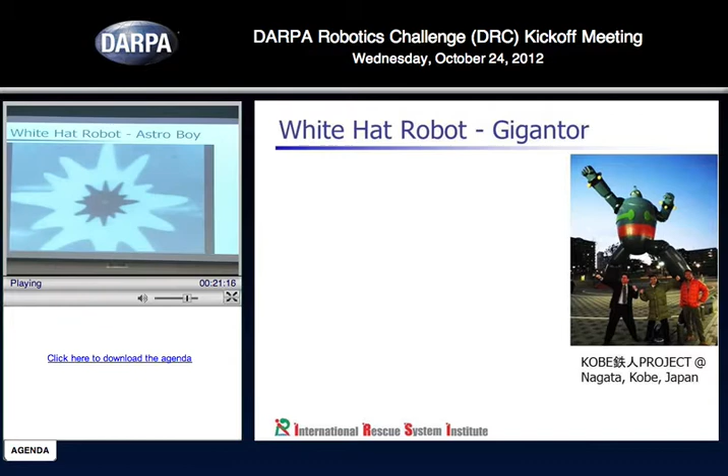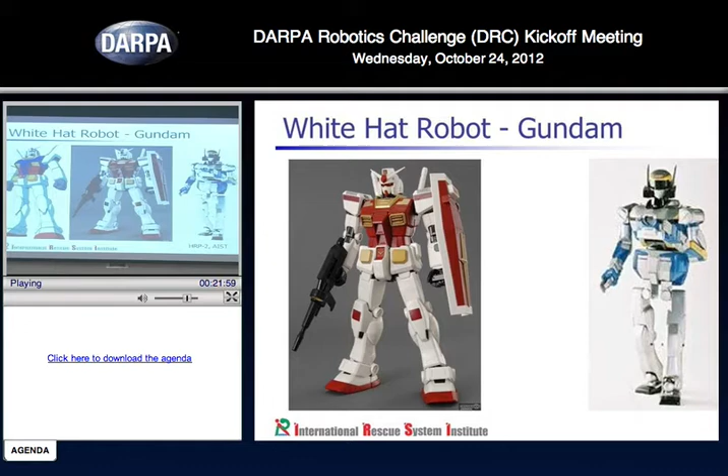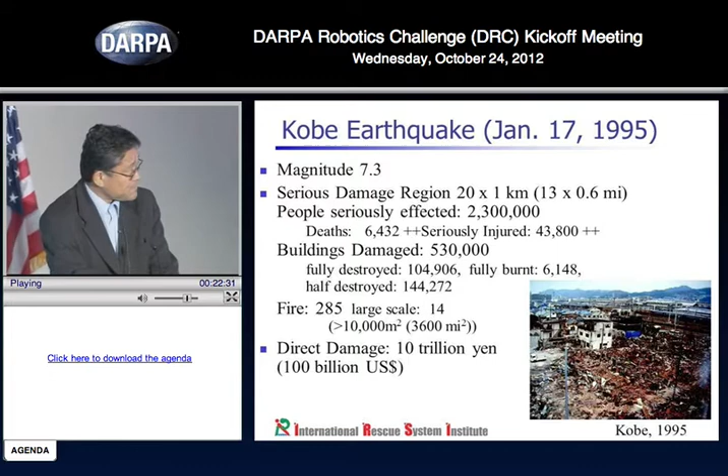At that time, I was really surprised to know more of this, and became completely involved in studying rescue robots. So we studied rescue robots from that time. This is one of the big projects of the Japan Ministry of Education, called the DDT project. I published a book from Springer, so if you're interested, please buy the book.

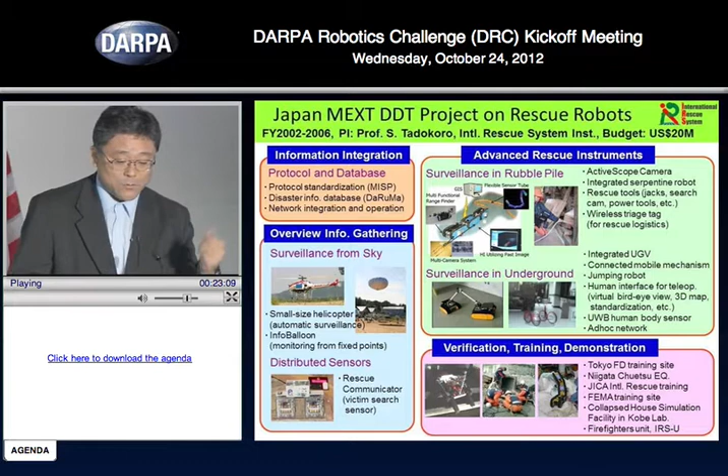This is a post, and yes, we did several things, for example a helicopter or some balloons to gather information or distribute sensors, a snake-type robot for surveillance in rubble piles, or UGVs, and some database for gathering information and so on. This is one of the outcomes of this project. The left-hand side is a normal video scope, but it stops here. However, our active scope camera can penetrate deep into rubble piles, so it is a very nice property in rubble piles and also in pipe inspection.

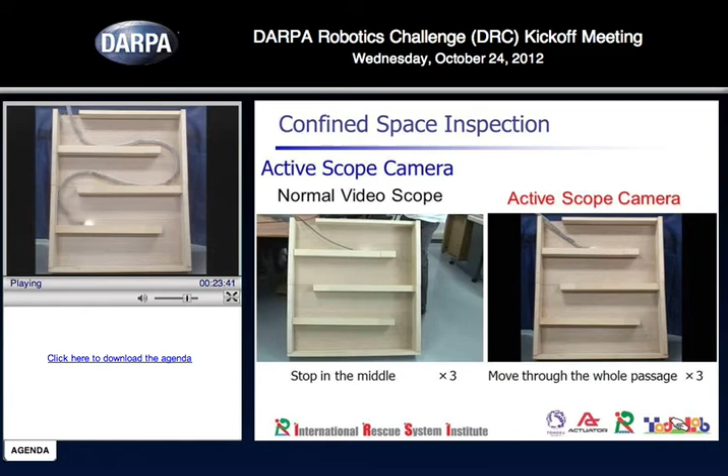It was applied to this construction accident which happened in 2007 in Jacksonville. For the forensic investigation, it was used, and it could gather evidence and information 7 meters deep in narrow spaces, particularly the shape and direction of cracks and cross-section of flakes and so on. So it helped that forensic investigation very much.

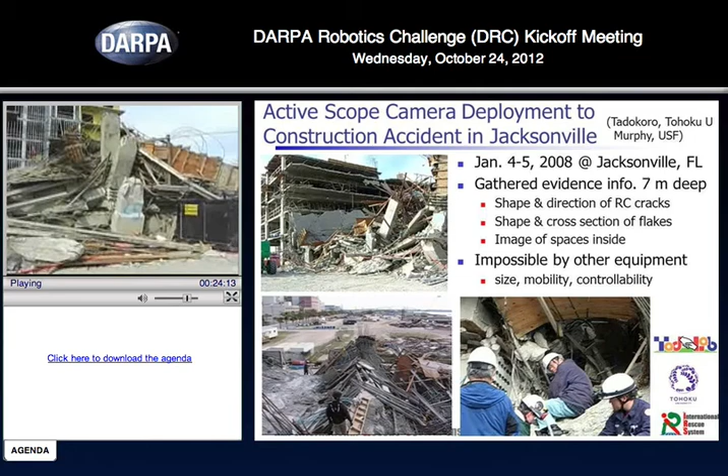And this is another case of a real accident. This is the Cologne historic archive collapse, and the active scope camera was deployed there, but actually it was not used there.

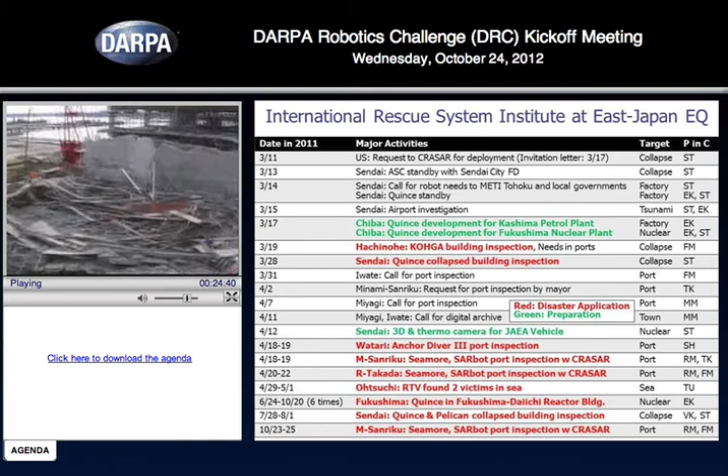So this is the list of the response by the International Rescue System Institute, which I established in 2002. We did several things after March 11th. The main things are: one is building inspections by UGVs, port inspection and victim search by ROVs, and the third is the Fukushima Daiichi reactor accident response.

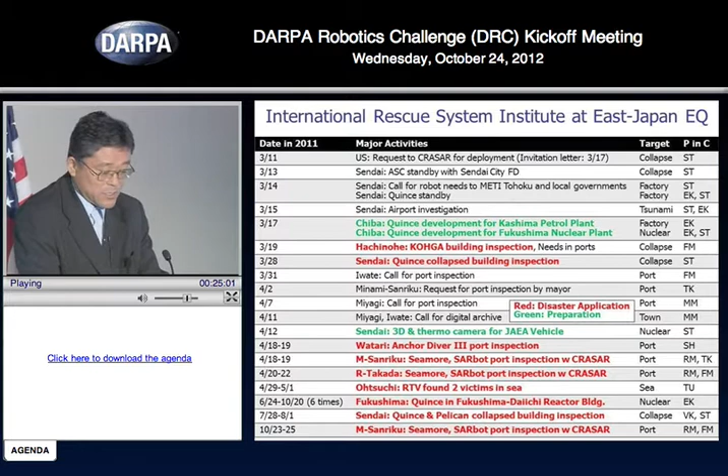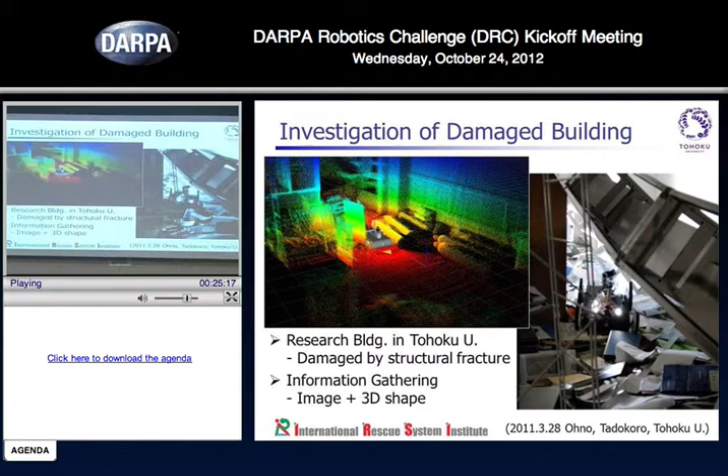This is an example of the investigation of damaged buildings. This is a research building in Tohoku University, and we made surveillance in the buildings two weeks after the earthquake, in collaborative work with Professor Vijay Kumar of University of Pennsylvania.

Maybe he is here. I told him in the morning.

It was really nice collaborative work because this is Quince, our robot, and this is Pelican, made by Professor Vijay Kumar. Vijay's robot could enter this narrow space autonomously, but Quince could not because it is too big. However, the Pelican can fly only 10 minutes. So the collaboration between UAVs and UGVs is really convincing, a promising way for surveillance of whole buildings.

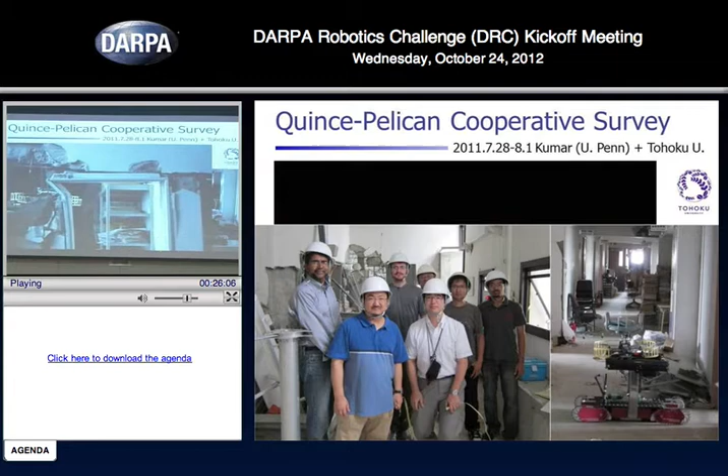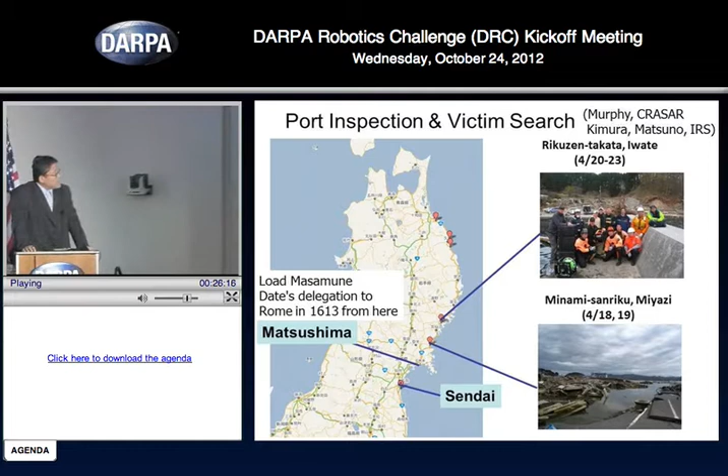This is another one, the port inspection and victim search, done by Professor Robin Murphy, Professor Fumitoshi Matsuno from Kyoto University.

The actual number was 30 microsievert per hour, and human workers could work there, but we could never live there. In these situations, our robots should work - that is the real application of the robotic system.

What are the needs of robots in Fukushima Daiichi? One mission is stabilization of the system, for example cooling and confinement of radiation, and decommissioning to extract the nuclear fuel is also a mission.

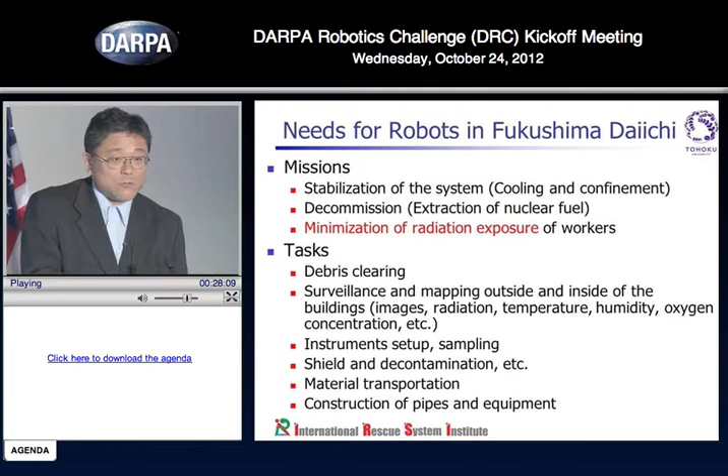Robotic systems are needed because minimization of radiation exposure is very important. There are several tasks: debris clearing, surveillance and mapping, instrument setup, sampling, shielding and decontamination, material transportation, construction of pipes and equipment, and so on. So many problems - we should create robotic technology for this purpose.

I really thank the iRobot company who donated 2 PackBots and 2 Warriors to TEPCO, Tokyo Electric Power Company. PackBot contributed significantly to the shutdown of this accident because it entered the nuclear building first. If we didn't have PackBot, we couldn't know the situation inside, and this operation could have been delayed significantly.

However, there was a problem. TEPCO people tested PackBot in Unit 5, and they found PackBot cannot go up to the second floor because of a lack of mobility.

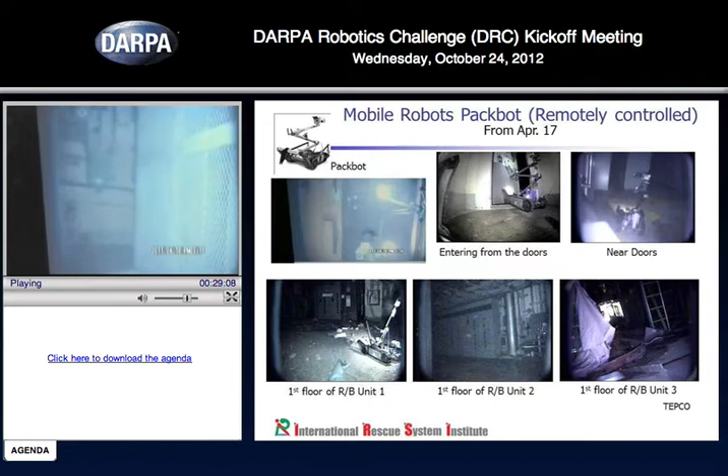Therefore, that was the reason our research robot, Quince, was used. This is a comparison between Quince, PackBot, and other robots. Quince is a research robot, so it has no established reliability, however it has excellent mobility, as I'll explain later.

PackBot is significantly used in Afghanistan and so on, with more than 4,000 units in use, so it is very reliable. But unfortunately it could not go up to the second floor.

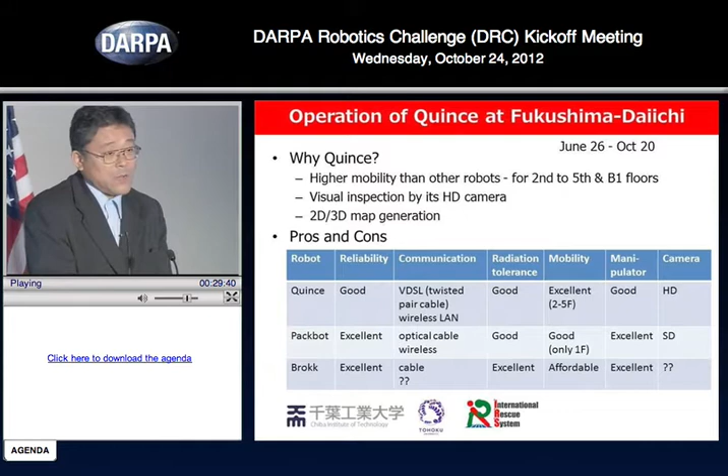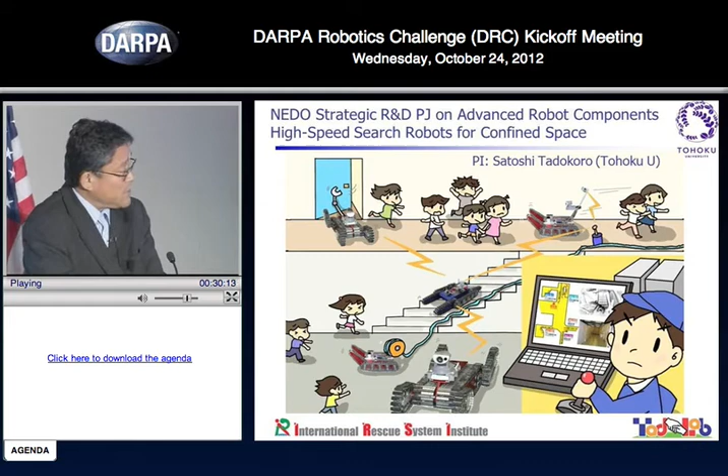However, in a disaster situation, mobility is insufficient and sensing capability is insufficient. Wireless is sometimes very unstable, and the human interface is not sufficient. So we wanted to solve those problems.

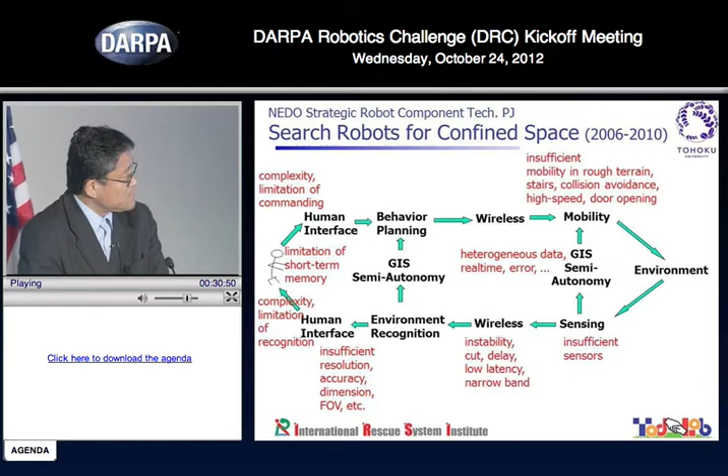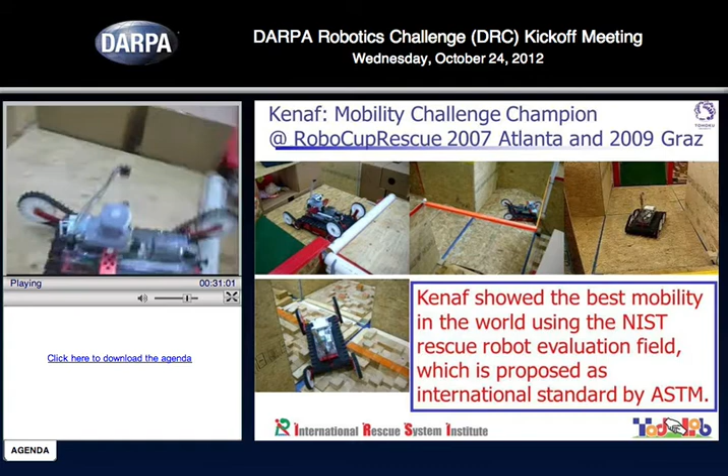We produced Quince and Kenaf as a previous version of Quince, and we tested Kenaf and Quince extensively in the RoboCup Rescue competitions.

In RoboCup Rescue, NIST designed the test method and the competition arena, applying the test method to these competitions. Kenaf achieved good mobility because of this test method.

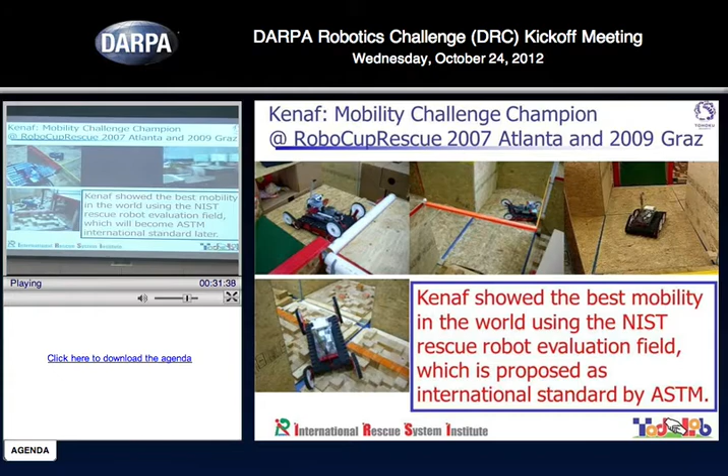So we really thank the NIST people, especially Dr. Adam Jacoff over there. Okay, this is another experiment.

This is E-Defense, the world's largest shaking stage, and we used this opportunity of collapse of a 3-story real building. We tested our robots with the Kobe Fire Department for entry into collapsed houses, mobility on collapsed roofs, mobility on beams of roofs, and so on. This type of real experiment helped us make Quince and Kenaf perform better.

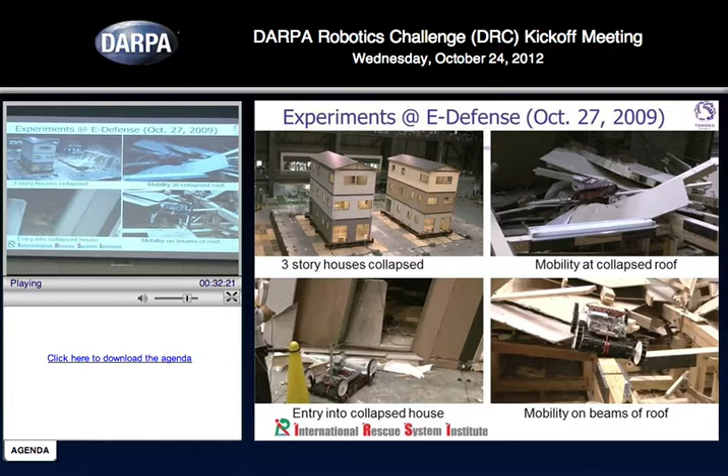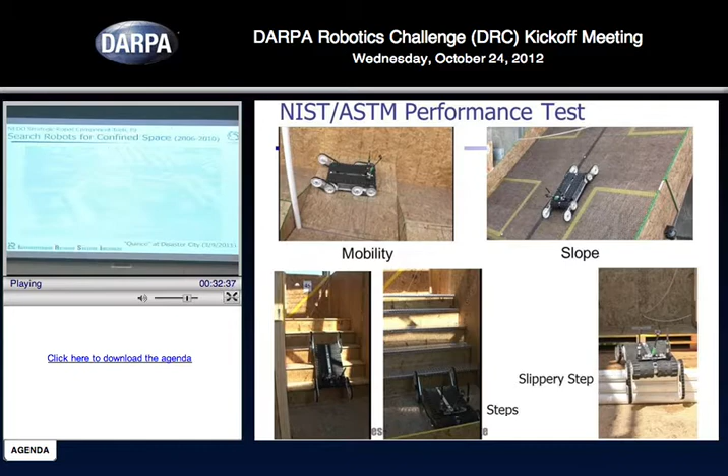And this was the test of Quince at the disaster city in Texas. And it was actually 2 days before the 3.11 earthquake.

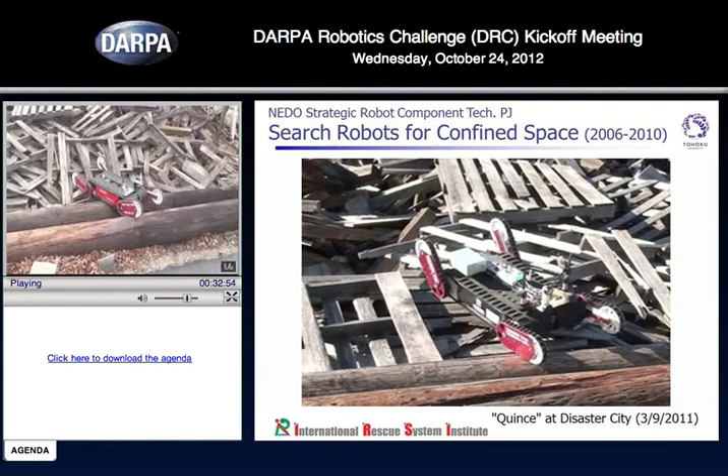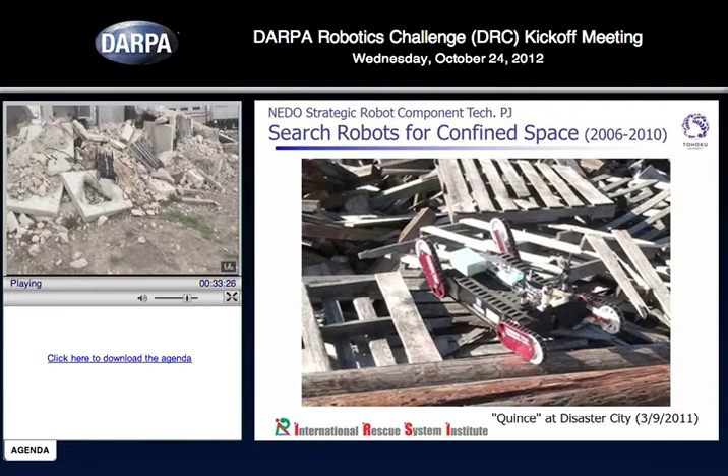I was really happy at that time, but after that, some very bad news from Japan arrived.

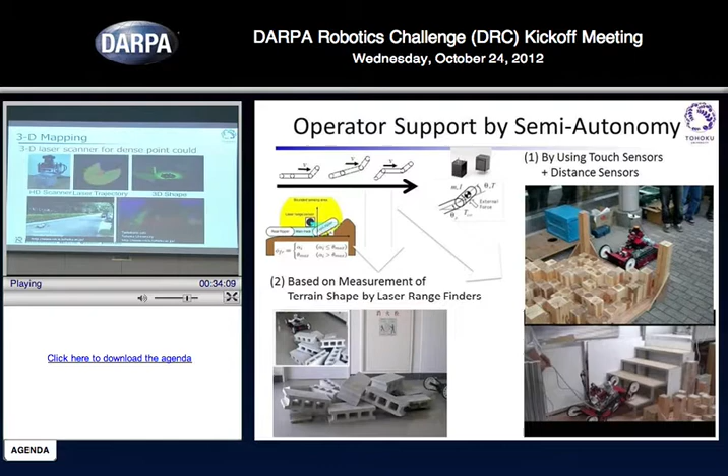And this is 3D mapping, using this HD scanner with a laser finder, we could make this kind of map very easily.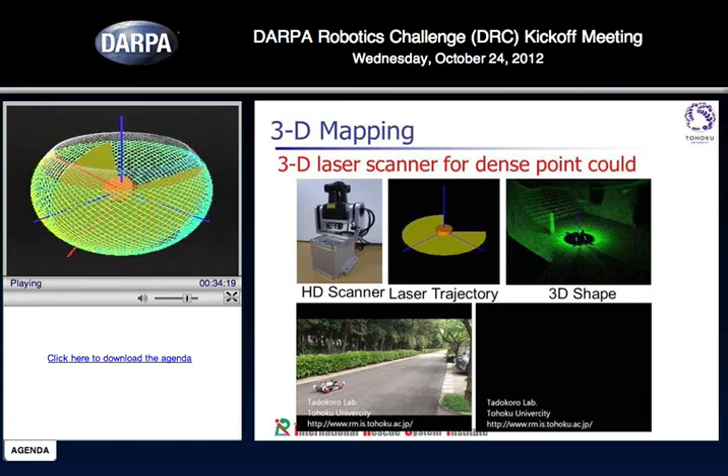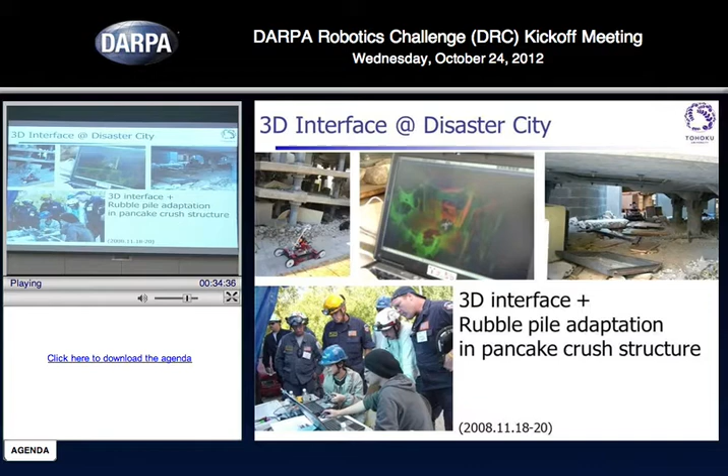This is an application to teleoperation at a disaster city. There are 3D obstacles, so we needed this type of human interface to teleoperate this creature in this pancake crush simulated facility.

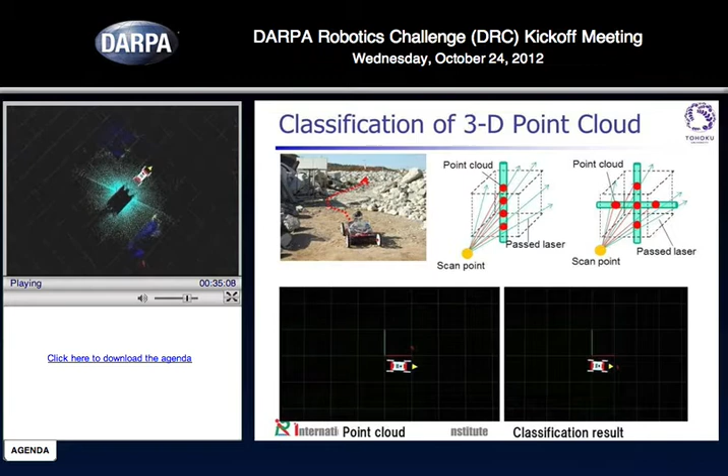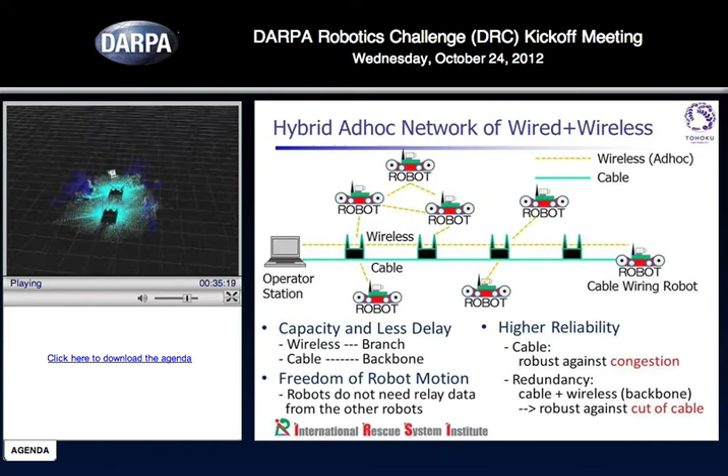We also developed a hybrid ad hoc network, which uses wired and wireless network. Using the cable, it is very broadband, and near the access point robots are teleoperated via direct connection by wires. But at a distance, it becomes an ad hoc network, controlled via the robot.

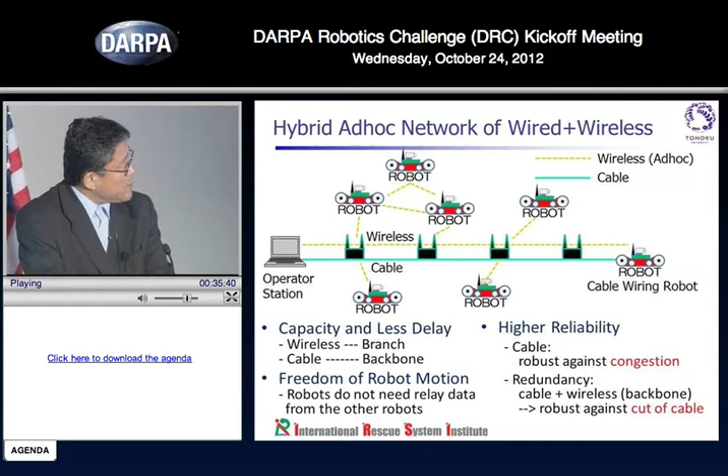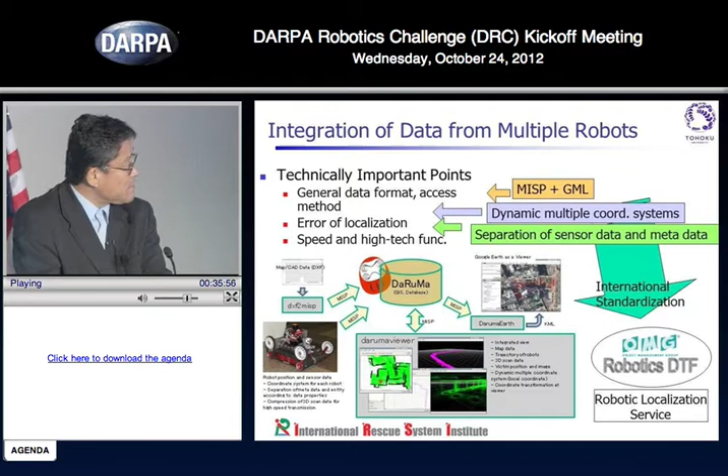However, this Quince was not intended for the nuclear power plant, so radiation tolerance was a significant issue there. We asked some specialists, particularly in space robotics, and learned there are two types of damage by radiation: one is radiation total dose, and the second is a single event upset. However, in the case of a nuclear power plant, gamma ray is the major radiation source, so there are no charged particles involved, so this is not a problem.

I was really relieved to know this fact, so we could start remodeling the Quince. However, we had some questions: can consumer semiconductors like Atom CPU, CCD, or LiDAR work in nuclear reactor building situations? If not, we need heavy shielding. If we'd like to reduce radiation to 1/10, we need 2 centimeters thickness of heavy materials. So it was a serious problem.

So we did tolerance tests at the JAEA Takasaki laboratory, and the result was that the weakest sensor was LiDAR. However, if the condition is 100 millisievert per hour and we set the safety factor to 0.1, it survives 5 days. The main usage of the robot is 2 hours in the reactor, then it's stopped, and the next day we use it for 2 hours again. In such non-continuous usage, we concluded that 5.2 days of tolerance is sufficient.

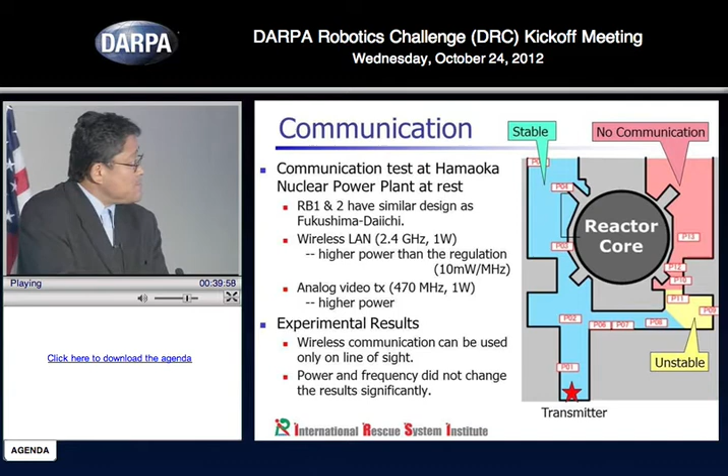Therefore, we concluded that wireless communication is hopeless, and we can only do it on the line of sight — we need wired communication. That is our conclusion. So we remodeled our Quince in this way, using communication cables and so on.

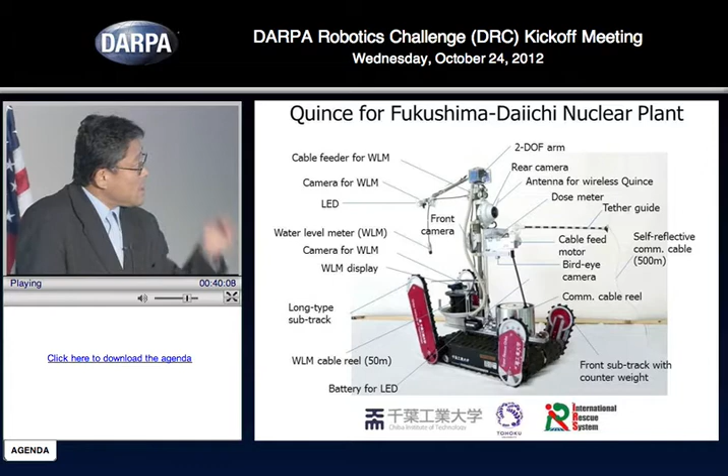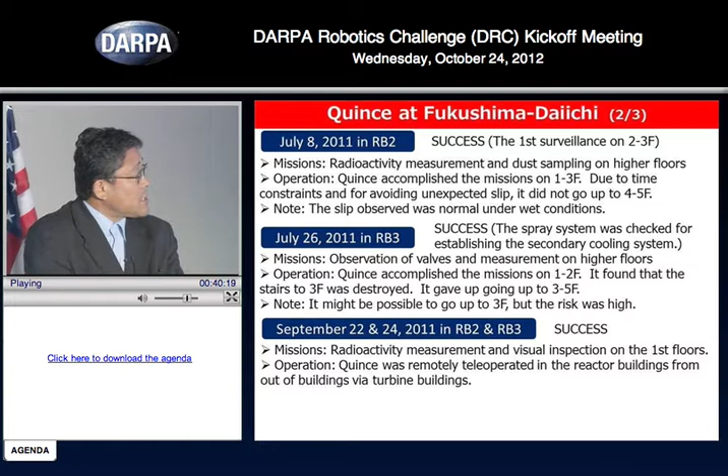Okay, so after that, in June, it began to work in the Fukushima Daiichi. And this July 8th is the second mission for Quince. It was really successful. It went up to the second floor and third floor and took a picture like this and measured the radiation. And it helped very much the TEPCO work of planning of the reconstruction in the Fukushima Daiichi plant.

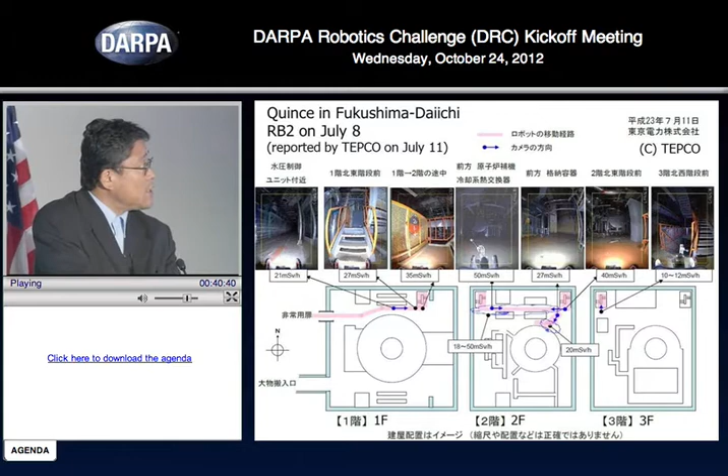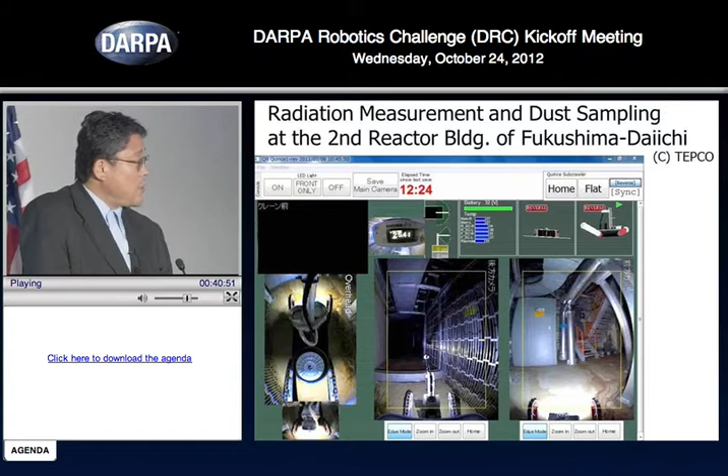And this is captured operator stations, every 1 second. It is not smooth, but actually it is smooth. As you see, it is going up from the first floor to the second floor. This is front camera, this is rear camera, and this is bird-eye view camera. And this is radiation dosimeter. This says 35 millisievert per hour. This is a really dangerous situation for human.

Could you skip to the last one? Yes.

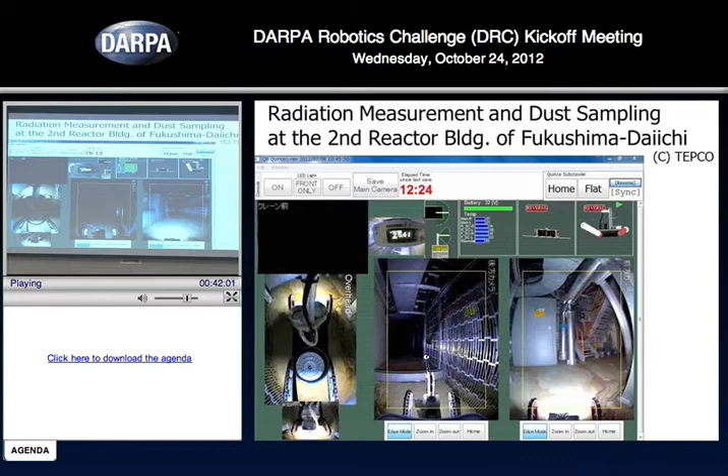Yes. You will see it drops when it returns to the initial. Yes, this is very slippery because it is iron steps. But it is very round because it was built 30 years ago, 40 years ago, I don't know exactly. So at first it was rectangular, but it's very round, very slippery, and sometimes it is wet. So in this situation, it had to work. That is a real work in the nuclear reactor buildings.

And this is the mission on July 26th. And this was really successful because at that time, TEPCO people were planning to set up the secondary cooling system using a core spray system. So they needed the situation on the second floor. So Quince went up to the second floor and took a high definition picture like this, of the valve of the core spray system and pipes and so on. And at the same time, it measured the radiation like this. So it helped their planning for minimizing the radiation exposure of the human workers.

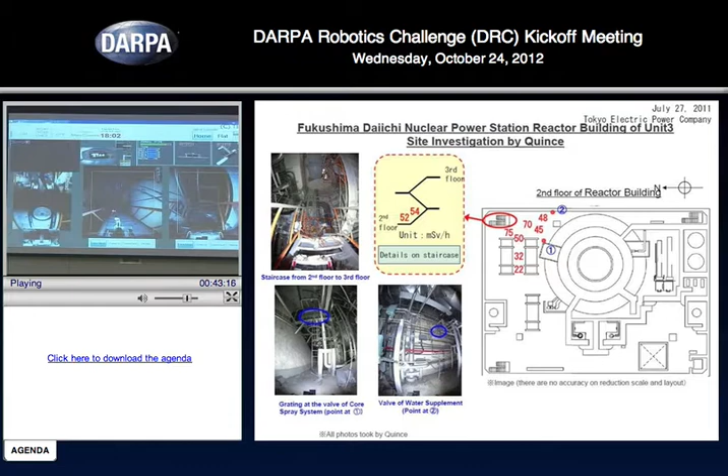And also, it went up to the third floor, and this is a picture from the second floor to the third floor, and it is a landing. And as you see, by explosion, it's a rubble pile. I think it could go up to the third floor, but the operator decided to stop there. And this is a picture. Such movies you can download from the webpage of TEPCO. So if you are interested, please search their webpage. That will help to know the real situation inside.

As you see, most places are ordinary situations. This is, I think, the second floor. However, on the third floor, it's full of rubble, and at least this landing is full of rubble pile, and maybe many robots cannot go up through this place.

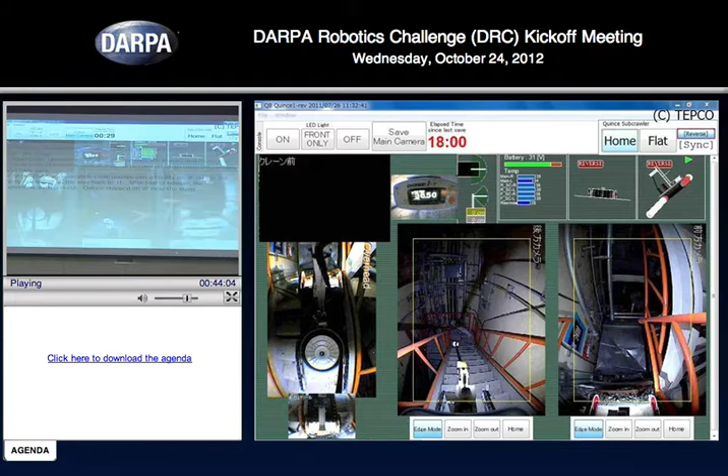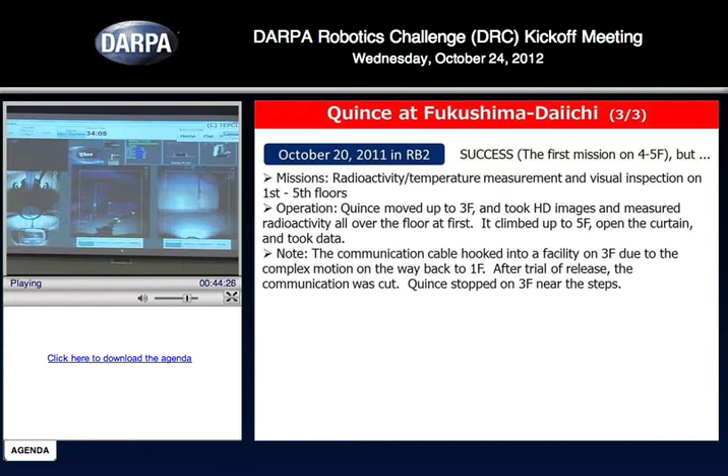Okay, this is the October mission. It was really successful. Quince could survey the whole third floor of Unit 2, and it could go up to the 5th floor. Okay, this is, I think, the second floor or third floor, and it is surveying like this. And Unit 2 was not exploded, so it is in the normal situation. However, as you see this number, the radiation is quite high, 10 millisievert per hour. So it is very dangerous for human workers to enter.

And please skip to here. Okay.

Yeah. Okay, so this is a picture of the 5th floor, and it was really successful because no robots could go up to this 5th floor. This is called the operation floor, and this is very important information.

Please skip to here.

Yes. So Quince opened this curtain by using its arm and entered this place. And it was really successful because it could check the situation of this crane and could measure the radiation. And in some places, it is more than 100 millisievert per hour.

And could you skip to this? Yes, to here.

And it tried to return to the first floor. However, on the third floor, the operator made a mistake, and the cables were hooked on the facility. And please go to the, yes, here. The cable is here, and it is hooked to this facility. So the operator tried to unhook this cable again and again, but unfortunately, after that, the cables were cut. So that is why Quince stopped there.

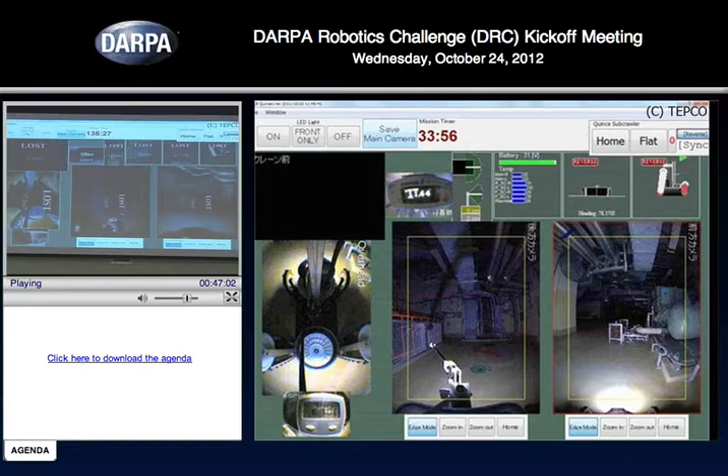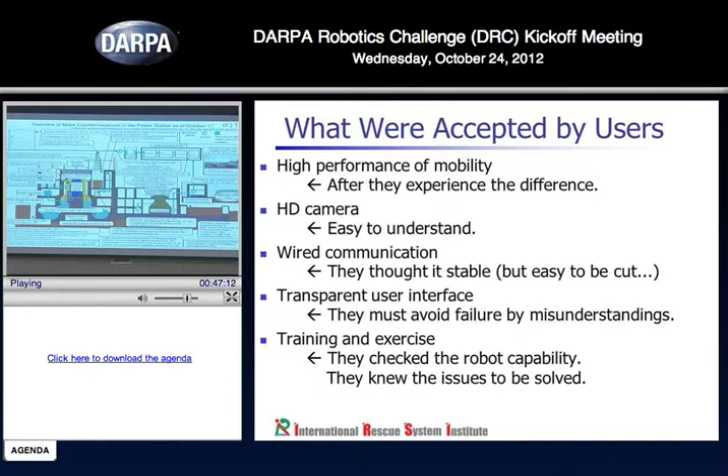Anyway, there are several problems remaining. This is a plan shown by TEPCO last year, 1 year ago. And according to this plan, they are making several efforts to shut down and decommission. However, for many of these, robotic systems are needed.

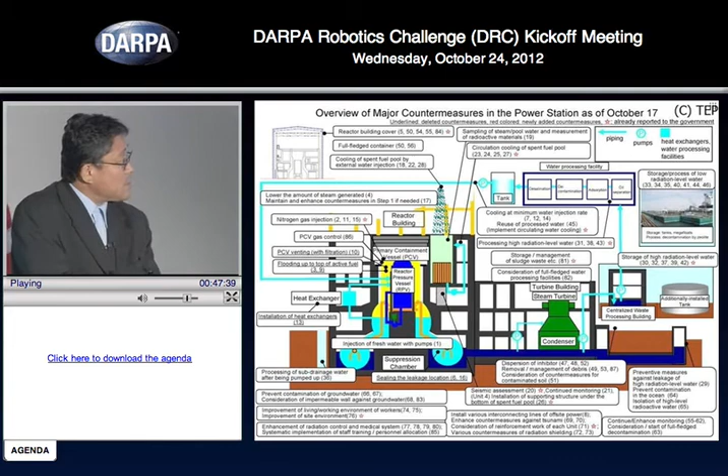And they should have some information gathering functions, sensing or light work, communication or teleoperation, and so on. And they require the capability of investigation and monitoring. For example, the sensing of gamma ray sources or thermal images and so on. And they need sampling of liquid, gas and so on. And they need monitoring of the environment, and inspection of similar things.

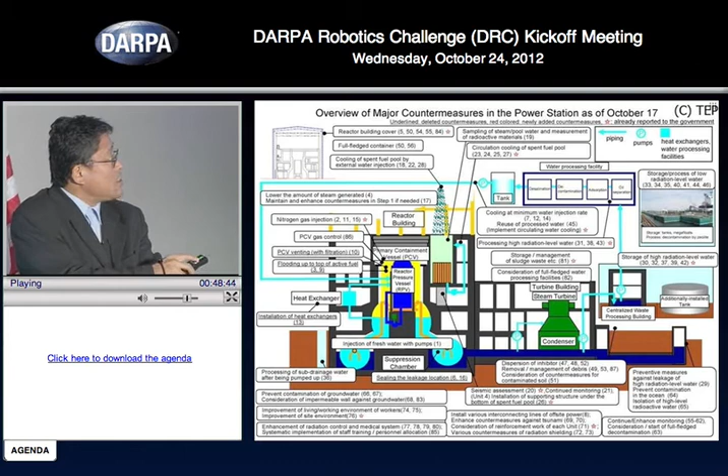And there are common conditions for performance and environments. For example, it is an extreme environment, so the radiation can be very high, with very high temperature or high humidity, and it should turn in narrow spaces in the ground. It should be 1.5 meters high and 0.9 meters wide. And communication is a problem because it should communicate in narrow reinforced concrete walls.

And the battery should survive more than 4 hours under continuous task execution, with short setup time, easy decontamination, dust-proof, waterproof, and light explosion protections are needed. And also, we should consider these points. A work plan for minimizing radiation exposure of workers. This is the objective of using robots.

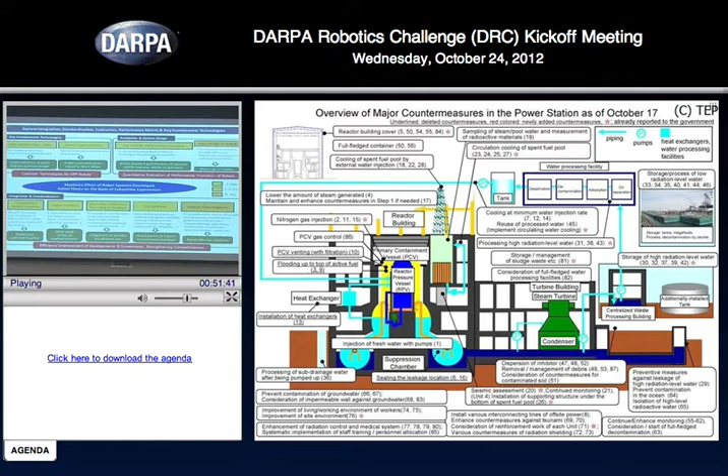And the sensor interface is important, standardization is important, and information collection, recording, and databases should be standardized. Test methods should be standardized with test fields for performance evaluations. Those are very important points.

Okay, so robotic systems are considered to be useful tools by the general public. Actually, I think the Eastern Japan earthquake was a historical first case where many robots were used. So in future disasters, they will become common useful tools. What are the robotic solutions? Accessibility to disaster information is a very important point. So at first, information gathering at inaccessible places is very important.

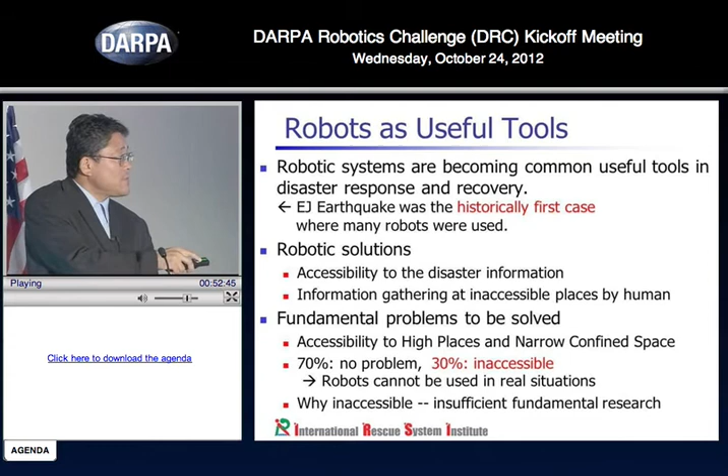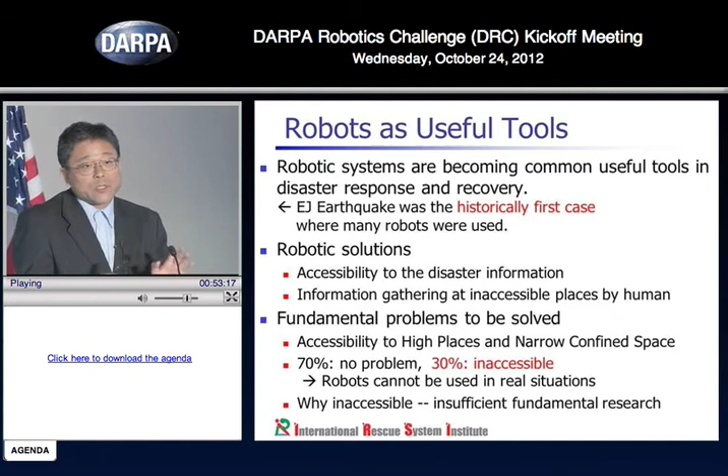However, I think there remain several fundamental problems to be solved. For example, if we want to check the situation at high places or narrow confined spaces, we have similar problems. For example, a wall climbing robot can move on flat walls very easily, no problem. However, if we check thoroughly the whole plant, we cannot do it, because for 70% we have no problem, but 30% maybe the robot cannot access. So we need such kind of solutions. And if 30% is inaccessible, the user says, oh, we cannot use this. So this is a problem, I think.

So what are the research issues? There are similar issues: mobility and positioning, sensing and mapping, light task execution, communication, teleoperation, autonomy, of course, and anti-explosion, durability, lightweight, and so on are very important. On top of that, reliability is a necessary condition.

Therefore, I think the science and technologies for synthetic systems, including humans, under severe constraints are needed. This is never a simple problem of mobility nor combinatorial issues for applications. And I hope this DARPA Robotics Challenge can contribute to the development of this science and technology. These are very important issues, I think.